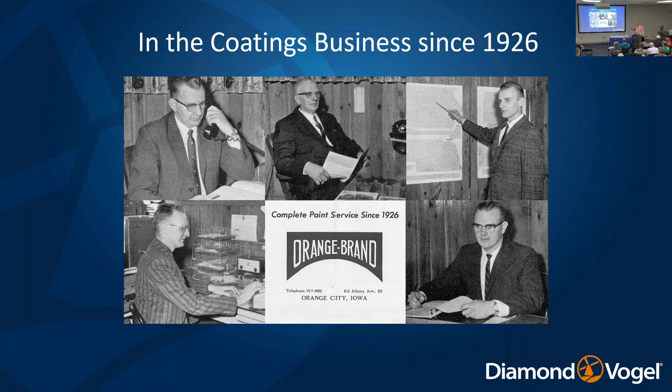So I got to grow up thinking about paint plants, but also more than that, he took me all over the Midwest. If I wanted to see my dad in the summer, we had to get in the car and go look at paint use in paint factories. Thankfully, I got a chance to see that.

Today we're fourth generation - Drew's daughter Mika is with us on our stockholder team. Thankfully that photo was a few years back, and I've aged nothing since then. But anyway, we love paint, and we have a long history of it.

But everybody has paint problems, and you can see even us - we're in this together. When you talk about complaints, it starts with what we do, because we make the paint and powder. So we get to have the starting point, and then we get to use it together as a group of paint applicators. All types of problems happen in the box or the bucket, even before you guys get a crack at it. And that's why you're all here at Spray Equipment - because somehow we've got to get this out of that box or bucket, transferred through your skill set onto a part.

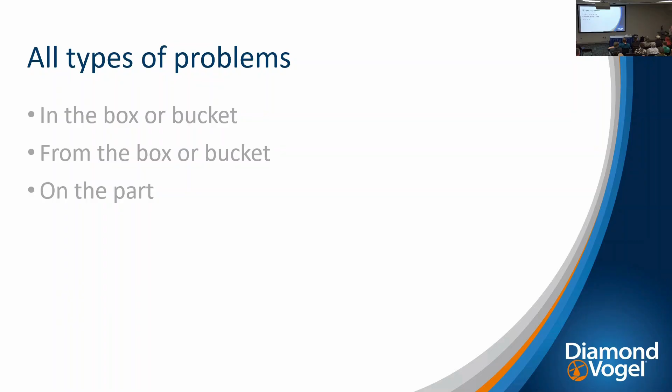Once it's all done and your job is finished, things happen afterward - some we know about, some we don't. The big thing is: are you prepared when you get that call? Who of you in the last month has had a call saying this paint just isn't quite right? Be honest - see, the paint guys are raising their hands. If it isn't the last month, it's the last year, and everybody would raise their hand. The big thing is, when you get that call, how do you react to it? How do you go about your day after that? Does it ruin your whole day? Well, you hope not, but we need some confidence about it.

So, in the box or the bucket - I have to admit, we do goof. It's pure and simple: the material made it through all the QC and quality control steps, but it just isn't right. Maybe it was right a month ago, but sitting in the box or bucket, things can happen - they can settle out, they can separate. Paint is a whole bunch of raw materials that in reality just don't want to be together. We put all this energy into mixing and compounding to force raw materials to combine. At times they just don't want to. Maybe the formula's been around for 20 years, maybe 2 months, but you just don't always know. We try not to goof, but we do.

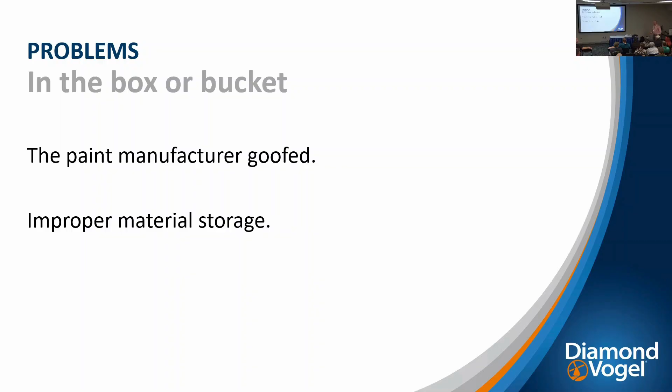Improper material storage - who wants to put a box of powder at the top of a warehouse with no insulation in the roof in July? Who would like to do that? Anyone? Well, it's possible - it might be 145, 150 degrees up on that roof line. What's going to happen to that powder? Billy? It's going to clump. So that's another thing you can almost guarantee.

This happens especially with shops that don't do the same coating every week or every day. You can just get the wrong thing on the wrong part, or the wrong part B mixed with the wrong part A - does that ring a bell? A and B, or this A and that B. It can be completely wrong material. That's something we have to work together on - how do we mitigate that? How do we mitigate 3 different part A's and 3 different part B's in your plant? It's pretty common, but it's so easy to get the wrong thing mixing together.

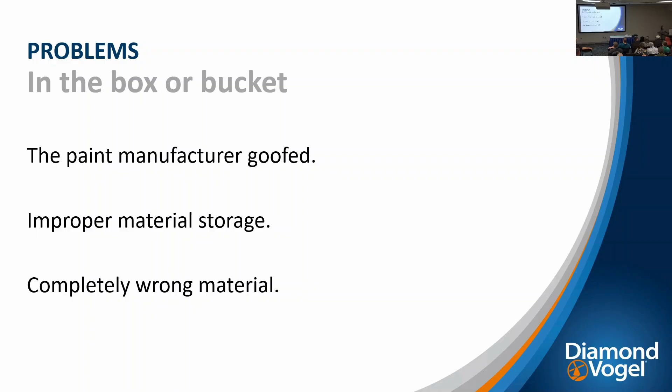So, other problems - why won't it spray right? Anybody have any feedback for me on that? Why won't it spray right? Viscosity - okay, and what does summer and winter do for you in viscosity? Changes, yep. That's the number one answer. What's the number two answer for why it won't spray right? Dirty guns, yep. Wrong pressures - too high, too low. What else? Humidity? Absolutely. We're just getting into that time of year where the seasons are switching - it goes good for 6 months, then for 1 month you can just struggle.

Two other things, at least two other. Proper application - proper application just for primer, yep absolutely. They spray differently than top coats, it's just not the same. One more - the wrong additives could definitely make a big difference in how it's going to spray. Wrong additives, wrong solvents, or maybe not the right solvent for that time of year.

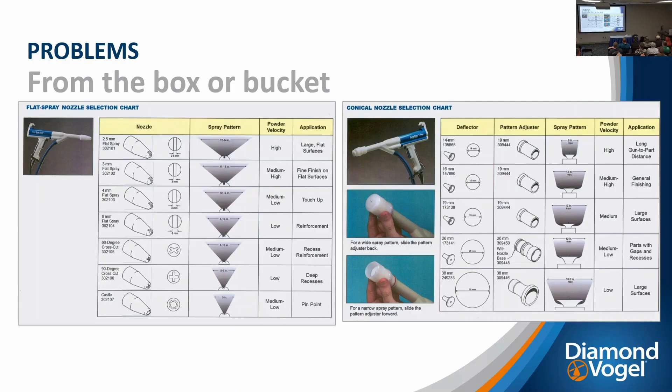You know, this wrap stinks.

I was talking to the Graco booth here. I don't know how they do it today, but 15 years ago, you could walk into a plant and tell if the turbines were running or not. You guys experienced that before? I think they're quieter today than they used to be, but you could tell.

And Rick, you're going to help me out with this, because we go back to number 2 guns. You guys know what a number 2 Ransburg is? This is ancient stuff, Lee. So number 2 Ransburg is the one that slowly turns, a gun about this long. And what's it used at, like locker fencing? It's driven primarily 100% on electricity. There's no atomizing air, no fluid pressure, nothing but electrostatic.

And a little bit of centrifugal. So for that gun, you have to be absolutely polar, so that wants to be as hot as can be in terms of solvency. But typically, the more regular guns, that'd be almost too hot for your turbine guns, your other ramped-up electrostatics.

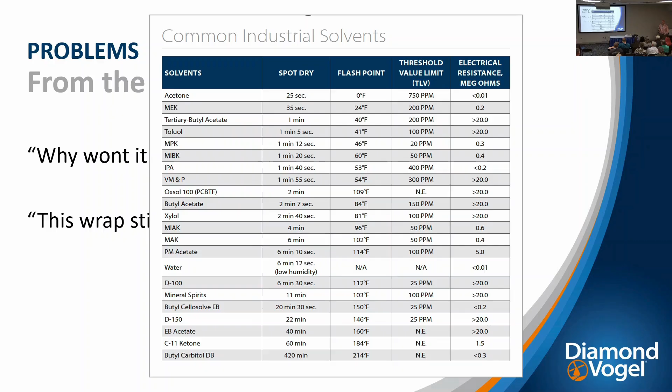It's fantastic when it works, isn't it? Makes it a lot of fun.

And then on powder, similar things. You don't have the solvency to deal with, but you have to worry about your grounding. Also with powder, you can actually be too aggressive if you've got a lot of inside corners, so you have to kind of blend out how much power you want to put into your charge field to get the best overall wrap and application. So that's just a control panel.

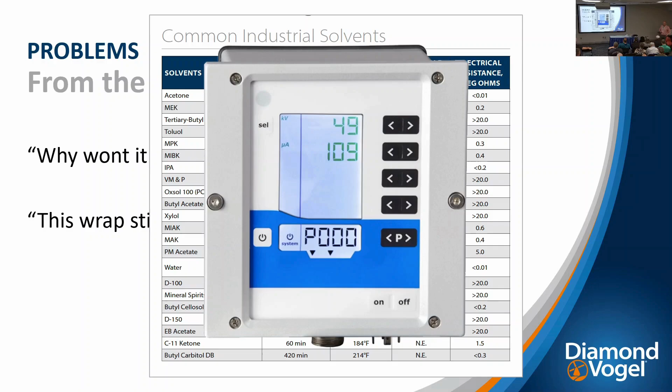And there you've got voltage and microamps of resistance. Most of the modern pieces of equipment, you can adjust them slightly. Dave, I know that's what you do, you go out and find that sweet spot. And then the paint doesn't hide at all.

I don't know if I have a picture on this, but I hear this a lot in the wintertime, when you go from warm paint kitchens to cold paint kitchens. Bobby, you talked about thinning material. It can be very easy if you've got cold paint to get it to your number 2 Zahn cup of 30 seconds. In the summer it took 1.5 gallons of reducer in your drum, and now it takes 4 gallons to get that same 20 or 30 seconds number 2 Zahn because the paint's cold. Then you go to spray it and it warms up a little bit.

It's like, man, where did my black go? This stuff doesn't hide at all. Well, you just thinned it out three times from what you normally do. So, guys have experience with that? Oh yeah, I heard that. That's a real issue. And if you don't think about it, it can catch you completely off guard. You're taking a drum of paint, getting an empty drum, putting half of it in, putting in half of what you just thinned down. And that's no fun, is it?

So what do you do to keep it warm, Robert? I have inline heaters and my systems are circulating back to the drum, so it's essentially heating the whole drum. And so do you do that for a while before you go and check the viscosity? That's one of the first things that started up. So like six hours later, then you check it, or? Check it at the halfway point of the day, make sure we're still on track with our day-to-day production. Did you guys hear that?

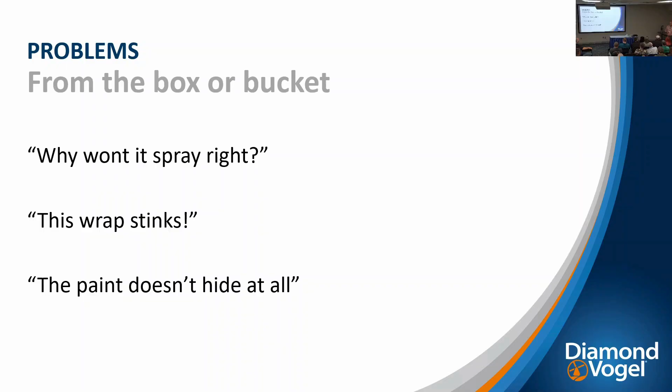Okay, on this part, no coverage in the corners. And that kind of lends back into some of these things we just talked about. This particular picture is a little out of sequence. But that goes back to this wrap stinks. I was looking at what I was going to talk about today and realized the version I sent them was a little out of sequence. But this is not recommended for having good electrostatic wrap. Also, if you had something with more angular features on it, it would really goof up your overall uniformity of paint.

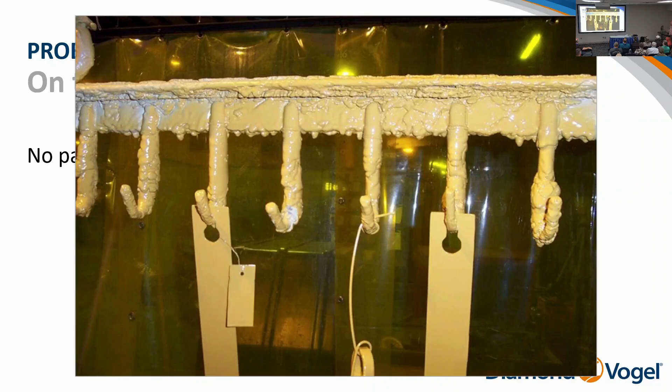But I was very, very regular in seeing this kind of part hook maintenance. This is maybe 15 or 20 years ago, this picture. And I think today there's a lot better management of hooks. It used to be just like pulling teeth to get people to work on their hooks. But it's just part of a good finish. Here's that inside corner.

So who's heard of a Faraday cage? Yeah, great, that's awesome. So that's just the basic premise that you've got this field, and as you try to put paint or powder, doesn't matter which, into this corner with electrostatic, it's almost like two magnetic norths on a magnet coming together. So the premise is that you can turn your electrostatic off if you're really concerned about that corner. Or on some of the modern systems today, you can go to half voltage like on turbine guns, or full, go back to half, or turn it down on your control panel. But this is a very common issue—you can get paint on it, but you don't really get that much paint. And so it can be a real weak area for corrosion.

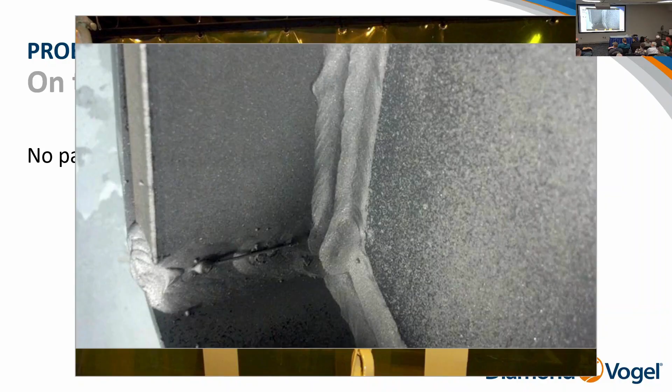Anybody have any story about Faraday cage? Not such a big deal, but just remember, there may not be a lot of paint even though it's covered visually. We'll talk about that with the device here. That's where cutting in comes into play. Picture framing, reinforcing, getting all the tough spots hit the first time around, and then you do your finish spray. And then you get another half coat in those areas, but at least you'll have it reinforced.

Craters, defects, and no gloss. How does that look? That's more defects. Crap in the finish. Yeah, that's pretty common. Now there's a vendor booth out here selling inspection lighting, which is a fantastic tool. And some of these defects are not that easy to see in a dark factory.

And so then you get it outside after you've had it all decaled, you're ready to deliver, get on the trailer—what happens? Oh shoot, there's just more stuff in this coating. And then you get something like this. Should we ship it?

No? Yes? Well, this could be an orange peel kind of a reverse hammer tone coating, but it's not. It's amazing how much can come through your exhaust system.

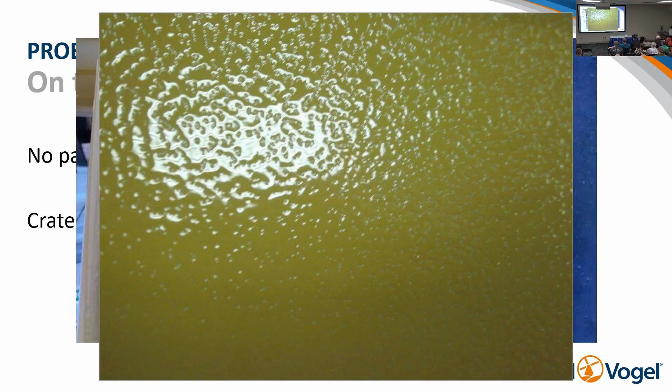So that's why we'd like to get involved as soon as we can, but we also have to sometimes talk on the phone about what could it be, how could it be. So what can we check to ensure that the part is painted right?

Well, this comes into in-plant quality control, and this is all things that you all can do, and that is to try to get a measuring system to create some consistency. So you can see a wet film gauge, dry film gauge, and just checking the part for primer before putting the top coat on it.

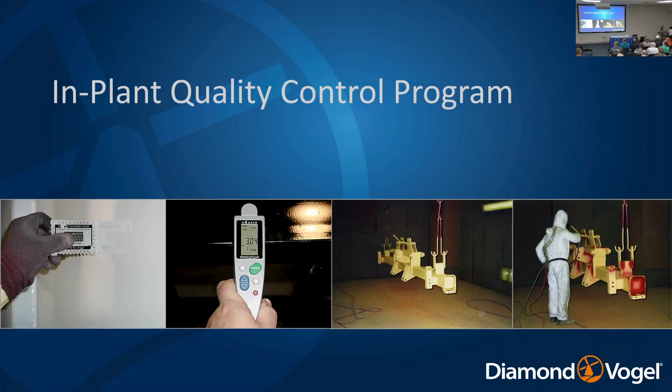The reason I put the last two slides, I guess to your right, is a contrasting primer to top coat. That's really, really helpful to get your film thickness from your primer to your top coat, because in reality you're only going to check the final coating system, not necessarily the coating layer. So how do you know that you've really done what you need to do between both coats?

So QC checks - talked about wet film thickness, and that's if you get something simple, you get 50% solids and you get 3 mils wet, you're going to get how much dry? 1.5 mils, okay? Years back, we used to have more like 30% solids, so it took 3 wet mils to get 1 mil dry.

So you've got to check your TDS, your tech data sheets, and that's how you can use wet film to predict dry film. That's just really something I would say at a minimum monthly, if not weekly, to have some program within your shop so that if somebody asks what's your dry film thickness, you know it. And then you can go out and show it.

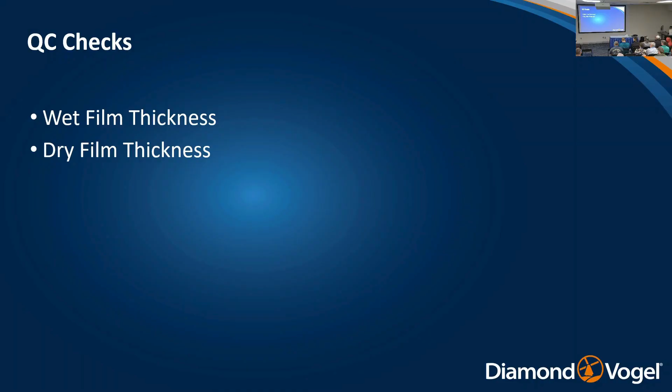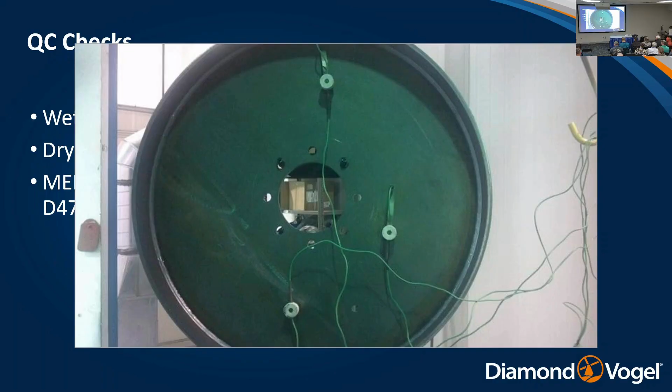This is more on powder, but it can be on baking liquids too - the MEK rub cure test. And this is an oven profiler, which is an oven temperature recorder. You can see the probes on it. You run that through your oven at your sequence.

And then if you do your cure test, which is an MEK, methyl ethyl ketone cure test, it isn't always the same. If you have your oven profiled well, it should be, but if you just do your quick test, because you don't do your oven every day, and if you have a breakthrough, it's like, oh wait a minute - it looks dry, it feels dry, but it isn't dry. So it's a good thing if you're doing powder coating or liquid that's dependent on heat to have an oven recorder for that reason.

And then just dry and wet crosshatch adhesion. Dry is where you use a knife to cut it, usually at a grid, and then you pull a certain kind of tape off to see if you have full adhesion or whatever you specify, because sometimes it's not capable of full adhesion, but 75% would be considered passing.

But then wet adhesion is something as simple as taking a bucket with a panel that's sprayed and then just putting it in RO water, reverse osmosis water, for 8 hours or 16 hours after cure, and then just taking a good knife blade, doing an X-cut. Does your coating have good wet adhesion? So we'll work with you as a paint manufacturer because not everyone has great wet adhesion, but if it does, you can check that at any time you'd like. That's typically where we see failures.

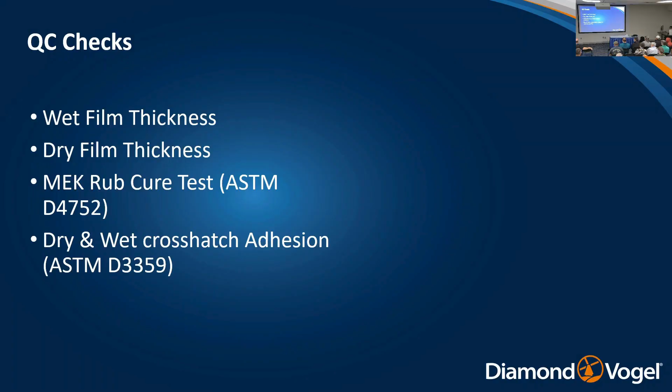If you've got a pre-treatment system and you leave a lot of dissolved solids on the steel when you're drying it out, that water is going to permeate that film and it's going to hydrate that dissolved solid like flour would on a countertop, and that paint's going to stick to that flour and not the countertop. So it's a reverse of that, but it's just a great example that you want to have that paint sticking to the substrate, not something in between.

Flexibility, impact is another one where you're trying to do some mechanical bending that can show some weaknesses, and just pencil hardness. Guys, we're all in school, number 2 lead pencil, HB.

Guys, remember that filling out the tests? I mean, that's getting to be old age now. But there's different hardnesses of that graphite, and if a coating's cured and it's spec'd to be H hardness, that pencil hardness is going to be able to tell you right away, did you get it cured? So those are simple things.

Hey Mark, back to your wet adhesion. Does it make a difference with the solvent-based material versus the water-based material, or are they pretty much the same? Well, that's a good question, because certain coatings are more permeable to water than others.

For a highly cross-linked 2-component epoxy, it may take 3 days for that sitting in a bucket to basically get through that coating if there's a contaminant between it and the substrate. Whereas another coating that's an air dry, whether it's water-based or solvent-based, but a low energy cure, it might be 4 hours. But if the coating has good wet adhesion, regardless if it's a 4-hour or 72-hour kind of test, it's really to figure out do you have good pre-treatment between the substrate and the coating, that there isn't some level of contaminant.

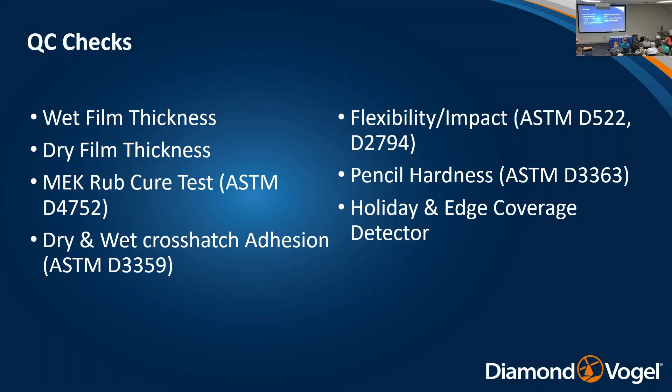So that's a good question. Last thing I have just on QC checks that I wanted to show this is, who's heard of a holiday detector or an edge coverage? A few guys on the paint side.

That's this device here. And what it is, it creates an electrical circuit. I love this device because it's really trying to figure out, do you have coating across the whole profile of what you're painting? And so it's really indicative of blasting underneath, but it can be just light in those corners that we talked about, like that Faraday cage.

So you can feel this, Billy, this is just a little wet. And then this is just a probe. And that's an old one. We call that the squawk box, but this one has more of an internal speaker. It's basically creating an electrical circuit. So this is the electrode, and then this is your ground.

On this panel, I had it sprayed on top of blast, lightly at the very top and a little heavier at the bottom, but it all looks black. So if it works, it shouldn't squawk till I get up in the corner. And then what that's showing is that there's little peaks of the profile that are peeking through the coating and creating an electrical circuit. So that's on the edge. But down here, it's not squawking.

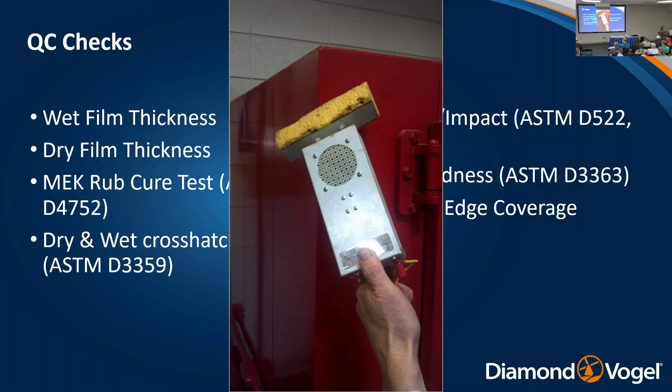So you guys have seen this. Now you know, but this is a good tool. And a lot of times you may not have this in your own factory, but it's just a good thing to ask your tech service or your sales rep if you got complex parts, if you blast, because I'll show you that on another slide, but you get this opportunity for these mountain peaks to peek through. Any questions on that?

So, and then I know we have a pre-treatment person here, and I won't get so deep into it, but I just like to talk about removing sharp edges and scale, and that goes back to this holiday detector. Paint loves to flow, but the sharper the edge, or the more perpendicular or 90 degree, the more likelihood it is to come away from the edge.

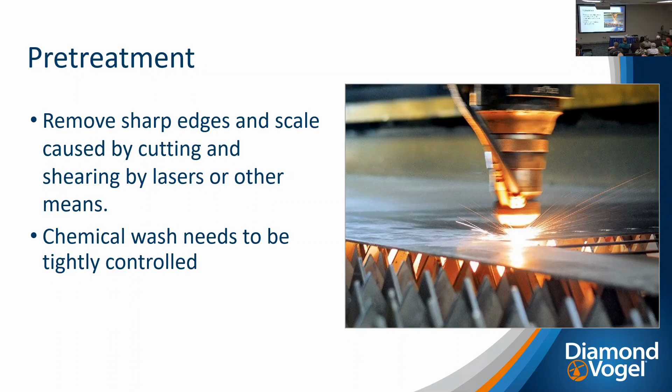And so to ensure that you don't have picture framing corrosion, you need to get those edges covered well. And covered well may take some mechanical preparation to create just a little bit more - it doesn't have to be rounded, but just create less of 90-degree angles on your edges. And then chemical wash, it just needs to be controlled. That's something for you to go deeper into at some point, but these things are variables that affect if we get phone calls. We'll demystify that process in a little while.

There we go. So she'll talk about total dissolved solids. We get that up in our part of the world in Northwest Iowa. We have very hard water, very hard. And if you go through and do your pre-treatment, but then you throw on our water as a final rinse, you're going to get a lot of flour on the countertop, a lot of hard water deposit, and that just does not do well with paint. So then we suggest RO, reverse osmosis, final rinses, sometimes deionized water, just to get those solids removed.

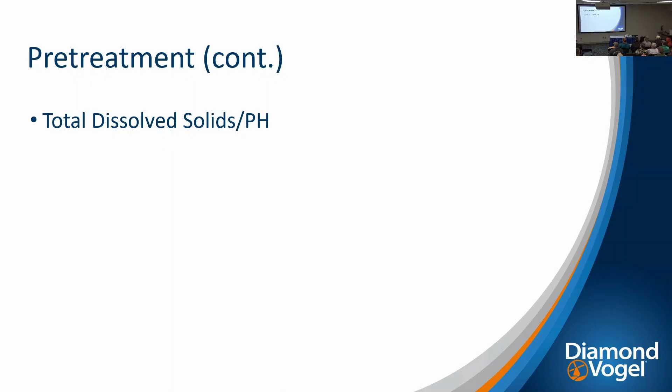Coating weights, that's a whole nother science. Copper sulfate substrate checks - have you guys ever heard about this? Anyone? Pre-treatment, I'm sure. It's just a little kit that we produce, and I won't do it, but it's basically a chemical that if you're going to direct to iron, it will turn like copper, like a penny. And if your steel, after pre-treatment, doesn't remove a preservative of a steel shipment or something of that nature, it won't turn as a penny. And that's a real problem because then you're sticking to that preservative.

And I know one of our major issues we had back in our dad's day, Rick, was there was a lot of steel coming from, at that time, Vietnam, some of those countries where they were really coming out with recycled metals. And it would come in, get mixed with domestic steel, and you'd have a preservative almost like a creosote or a Vaseline kind of jelly on the steel. The American steel wasn't like that. They'd go through and pre-treat it, not thinking about it.

And then literally 3 months later, we'd have paint falling off on one part of the machine and not on the other. And this test really helped us because you go through the same pre-treatment process, but you really weren't taking the preservative off, even though visually it looked okay. Don't hear about that as much today, but it's just one of those tools to kind of verify and help you get down to the root of what you may be dealing with. So don't forget about that one.

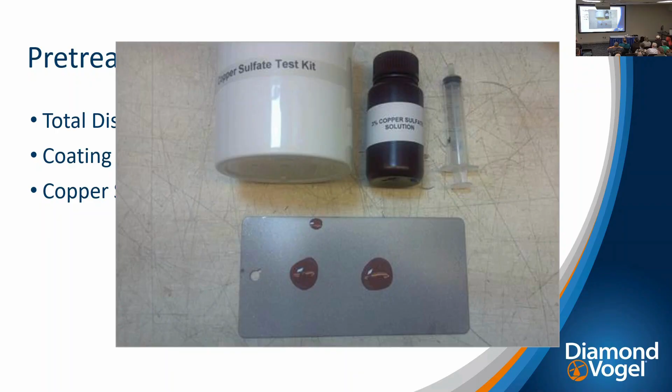We talked about wet adhesion and then just surface profile. So if you're blasting and you're using hot rolled steel, you get that scale that comes from the mill. But then depending what your blast media is, what type and what kind of pressures that you use, you're going to create this blast profile, which is fantastic for paint adhesion because you can just kind of lock in like Legos in these peaks and valleys.

But ultimately, to not have that machine go off, you need to be at a minimum a half a mil above the profile, if not more, to keep those peaks and valleys covered. And it's very, very simple to not do, to get enough paint on.

So you guys have strategies about how you make sure you get enough paint on? Anybody gone through this? Who blasts in here? So just a few. So you guys that blast, how do you measure your profile? Profilometer. Bobby, can you guys give a little explanation how that works?

And it puts a little pin in. We shoot for about a 1 mil profile, which is almost a beautiful satin look. And what would you say this is? This is probably like 1.5 mils here. Do you use shot or do you slag? Round shot. So you more peen it? Yeah. Does that make sense to you guys?

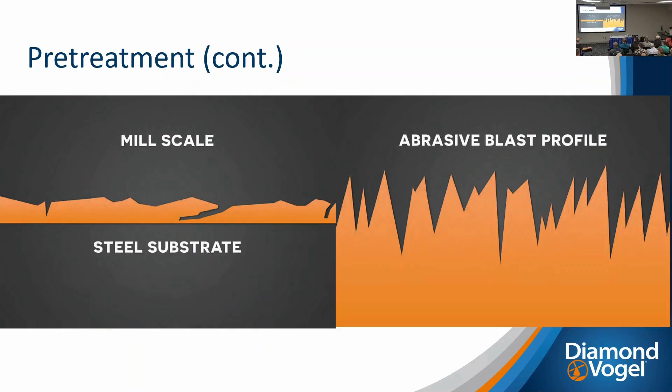So anyway, I can't stress this enough, because this is where we get most of our complaints of corrosion. It usually doesn't show up for 6 months, but you'll get this call. It's like, I got measles on my trailer, I got measles on whatever I'm building. It's like, well, it's just a little bit of corrosion popping through.

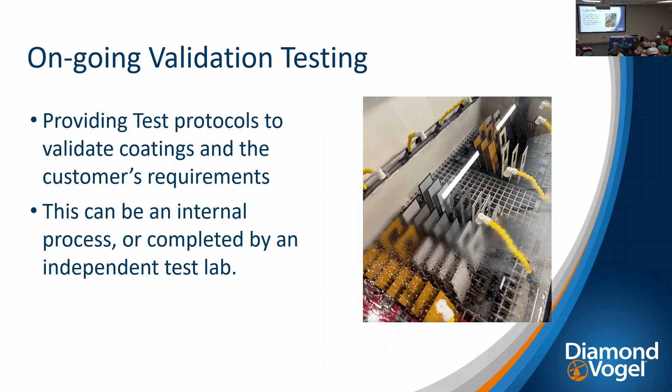And then just ongoing validation testing. These are more things that we would do to help you, but trying to do first articles or something similar to what you're doing, but on a test panel, and just monitoring your system over 3 months, 6 months, 1 year, 2 years. Are you stable? Because if you get somebody asking, you want to be able to show, hey, we're doing our best to make sure that we have some stability in our process.

So when you get the call, I like to say, stay calm. And when you get that field complaint, because you'll get it first, and I know you guys would raise your hands when you've gotten that call. It's like, well, how can this be? I mean, we did all these things, we tried, and many times it isn't something exactly that you think of, but once you get it out in the wild blue yonder, almost anything can happen.

So I like to identify the environment. So if you guys manufacture in Kansas, and in the next 3 months production goes to South Florida and Key West, but you've never sent things to Key West, a year from now you might get a call because you just don't have experience with your product being in Key West. The good news is that if it only happens in Key West, Florida, and things you've sent all over for the last 10 years haven't had issues there, you've got a challenge for Key West, but you don't have complete failure everywhere.

So that's what I like to look at. Not that I'm looking to defend, but you don't want to go to bed thinking, oh man, the whole world's falling apart. Because we got enough of that in the world, right? Yeah, we got enough. So identify that environment.

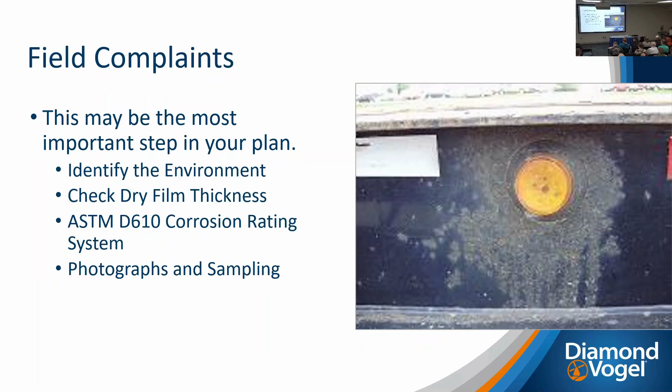I can tell you from a paint manufacturer's perspective, I want it to be my problem because we can fix it. When you get into the point of trying to have that talk, it's not to create defensiveness, it's just to brainstorm, because many times it's an anomaly that wasn't even thought about, or you go back to production records and something was different that day. So I like to say, if you can duplicate it, you can solve it. If we can duplicate the failure, we're going to have high confidence that if we find a fix for it, that's history.

So that's how we're going to be motivated with each other. It's not to create, you did it, I did it, she did it, he did it. It's let's figure this thing out. And if we have to figure some way to mitigate the risks and the challenges and the costs, it's much better if you've got a solution. Otherwise you just throw it under the rug and hope for the best. And serendipity only happens once.

I mean, that can happen. You get something you just will never, ever figure out. I've been through that, but many times it comes back, hopefully not to haunt us. But anyway, that's some ideas I have for you, based on a lot of just being in your factories. Any other questions, concerns? JD?

I have a comment for everybody. If you get a phone call from customer service or a customer complaining that when I wash my machine the paint comes off, the first question you want to ask is, what's the PSI rating on the pump you're using? Absolutely, if it's 3,500 PSI, you got a problem. It's going to take anything off.